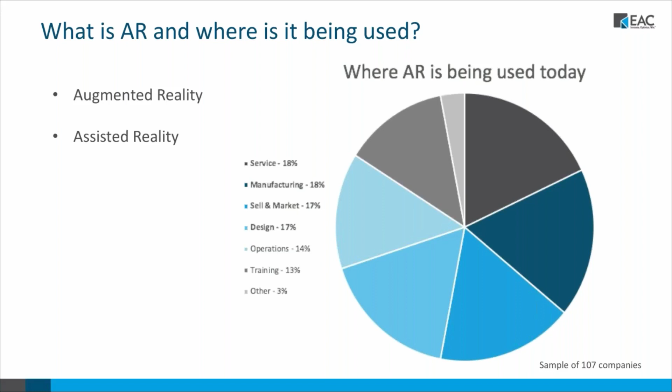And when we're talking about using AR for service, we're talking about the creation and delivery of service manuals, parts catalogs, and technical instructions. All of these assets show you how to do something. Turning these assets into an AR experience means repurposing the 3D models that you already have by taking that service information and putting it directly onto the product that that person is interacting with. We can do this with troubleshooting, remove and repair tasks, and parts identification.

I'm not sure about you, but I hate reading manuals. I'm a visual learner. A lot of people learn much faster actually seeing the process done as opposed to reading about it. You can now look at these real parts and see how they relate to each other by watching an animation of how those parts come apart or an animation of how to assemble those parts.

By doing this, you don't have to take yourself aside to read a manual. You can visually see this right in front of you directly on the products. There's also remote expertise where you can have a connection to the internet and have a subject matter expert over your shoulder, in essence, that can write on your display on whatever it is that you're looking at to make comments or tell you that this is the wrong part, etc.

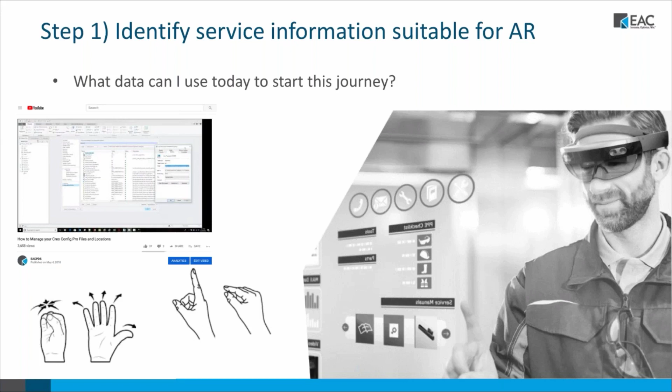Now let's go back to the question of what types of information make sense to leverage and what types of information should we recreate. You may have content that in the shorter term may just make more sense to use in assisted reality, where you apply a new style sheet to it and now it displays on an AR device in an easily consumable fashion.

As long as you are able to use the content by seeing a visual on your device, it can be displaying a graphic or showing a parts list or seeing an animation of a step-by-step procedure. Or you can find out after you've finished troubleshooting if the piece of equipment is operational again. Make use of the information you already have and create new content only when needed.

So after we identify the service information suitable for AR within our organization, we can then create animations and exploded states inside of a technical publication software like Creo Illustrate. When choosing a technical publication software, you should be looking for a tool that allows you to communicate accurate step-by-step instructions, provide quick and accurate parts identification, and create interactive and up-to-date illustrations for reuse.

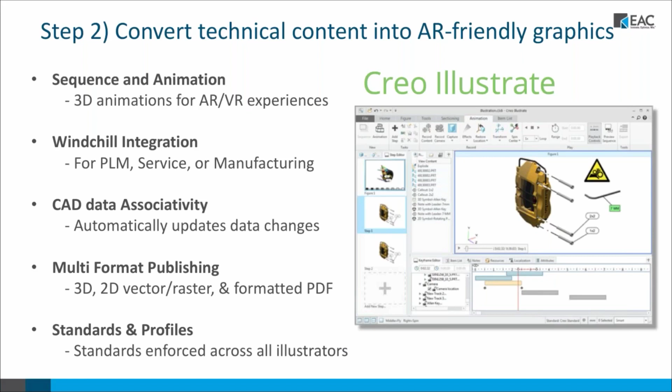Creo Illustrate does all of these things to create assets like service procedures, parts catalogs, assembly instructions, training manuals, marketing materials, and operating instructions. So our first step was identifying our AR suitable service information. Then we convert our 3D CAD models and technical content into AR-friendly graphics. Then our third step is to expand our library of AR-ready service content.

So once you have all of your content in visual graphics, including animations or exploded states, then we can start to publish and author those graphics as AR experiences. So content creators, technical writers, and product development engineers with no prior coding knowledge can create these experiences using Vuforia Studio. Experiences authored in Studio can be accessed from smart devices such as phones or tablets or wearable devices.

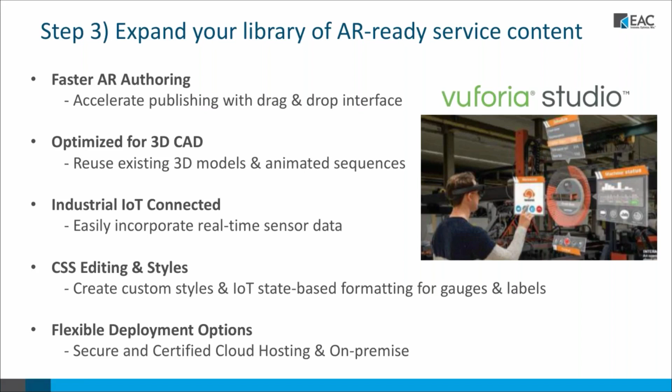So I'll just quickly go over a recap of what we just talked about, and then Todd will go into his demo. So as a recap, you're first going to identify all the information in your company that relates to service and categorize it as either AR-friendly or non-AR-friendly content.

Then you'll convert your technical content into graphics with a technical publication software like Creo Illustrate, if you haven't done that already. And then once you have these graphics, you can then transform them into AR content with Vuforia Studio. So they are ready to then be used for AR on a smart device or an AR wearable like HoloLens.

So I realize this is a lot of information. So you may be wondering, how do I actually get started with this augmented reality journey? It's a good question. You need to make the decision to actually pursue it. Don't let the fact that you may have content you consider not suitable for AR prevent you from actually exploring it. Everyone is on the same path, and everyone is just starting their AR journey.

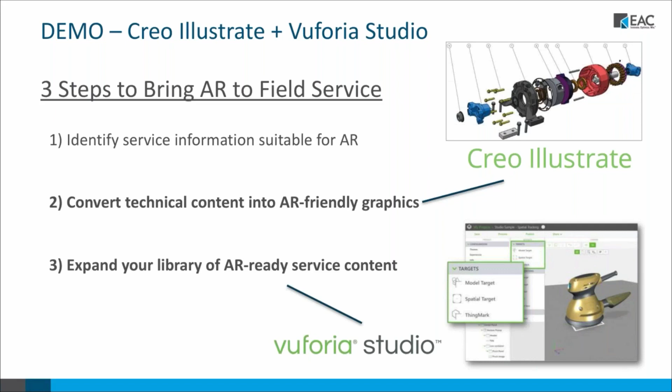So now that we've gone over 3 steps you can take to bring AR to field service, I'm going to turn it over to Todd so he can give us a quick demonstration on PTC's AR suite, Creo Illustrate and Vuforia Studio. So let's get started.

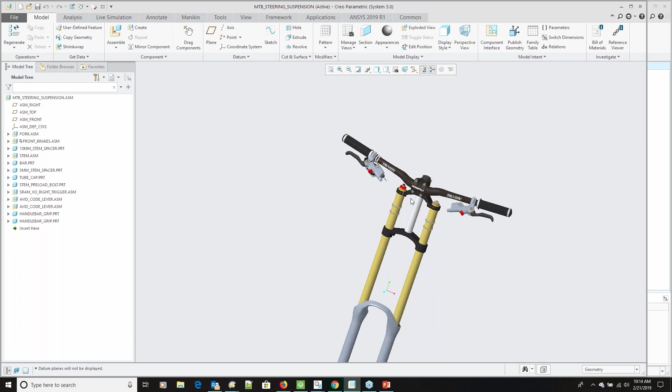So the first step in the process would be to take a look at the information that we have that we want to consider for augmented or assisted reality content creation. So in this case, I've got Creo Parametric up. I've got this front fork suspension for a mountain bike, and I might want to look at different things here as far as sharing this out and creating an augmented or assisted reality experience.

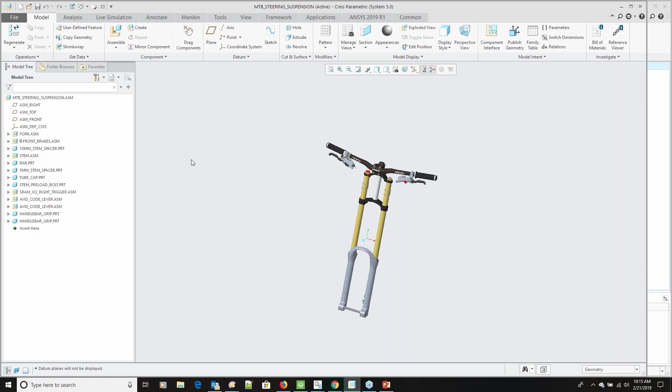So the general workflow here is that you're going to create your CAD information. Doesn't really matter whether it comes from Creo Parametric or other CAD platforms, because we've got Creo Illustrate. That's sort of the bridge between the CAD content creation tools and the augmented or assisted reality. So I'm just showing this from Creo Parametric as the starting point. So that's how we'll proceed. So I'll go ahead and put that away.

And now I've got Creo Illustrate. It's going to look very similar at first glance as far as the user interface. What I've got right now is just the same model pulled open, and we're actually looking at a published representation of that front suspension. And I'm in the process of creating a new figure. So Creo Illustrate is a tool that can be used in a number of different ways. We'll show you some of the different options here and how you can take that information and create figures for illustrations, as well as the augmented reality experience.

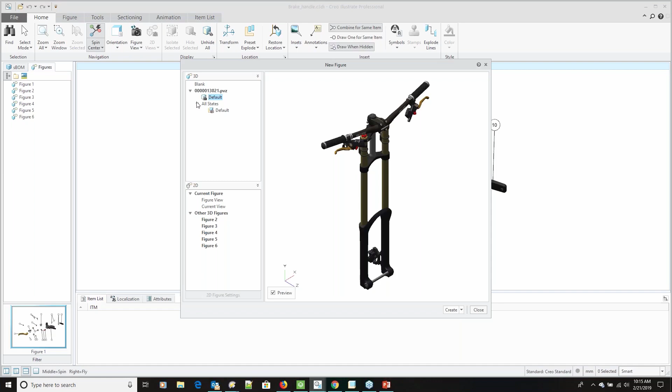So I'm just in the process of creating a new figure here, so go ahead and do a create and close, and I'll just go ahead and use that view. So this is where I would create different figures. So in this case, I've got this figure that I just created, and I've got lots of things I can do here as far as the orientation and explode states and animations and things like that. I've got a number of other figures that I've already created. You might see one down here in the lower corner.

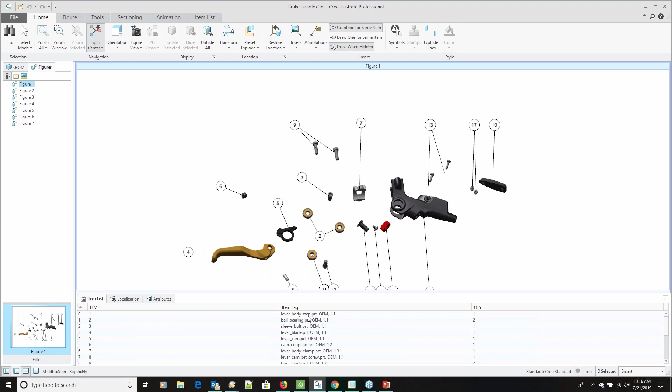So let's take a look at some of the types of things I can create with the Illustrate tool. So this might be something that would be useful for assisted reality. In this case, I've got an exploded view with some callouts, and I've got a parts list. So this parts list information could be set up in a text document or a PDF or something like that. So I could view that and overlay that and see that information off to the side, maybe looking through a device like a Vuzix, where I've got some textual information that I want to click on components and have them highlight and call them out and get specific information on that from there.

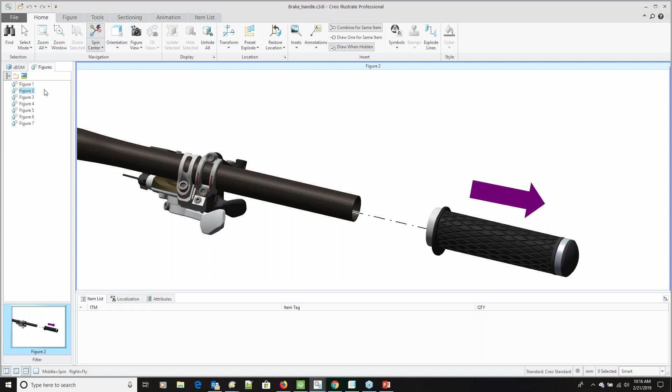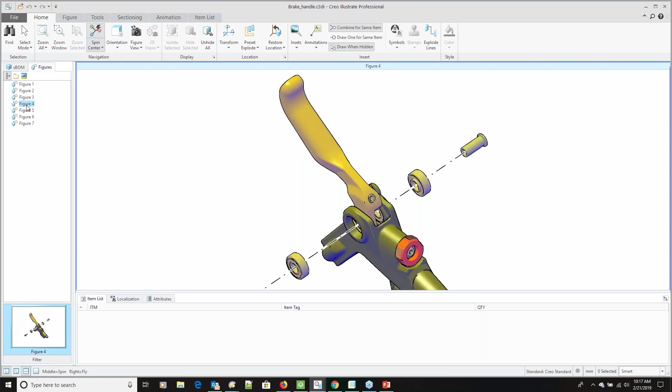Other types of figures that I've got, so again, Illustrate is a tool used for creating images and things for consumption in technical publications, whether that's web-based or PDF or augmented reality or assisted reality. So I've got different exploded views here just to show how this would look for technical illustration. So lots of different options for formatting the display and bringing in libraries of components and creating item lists and callouts and things like that. So here's another figure that I've got. So we're basically just peeling apart the model and creating the different views of the illustrations that I need to document the process.

All right, so I've got that set up here, and then another option here, let me go ahead and close that version of Illustrate. I've got another model that's in the background here, and we're going to get there in a minute. That actually is my Vuforia Studio. We'll come back to that in just a minute.

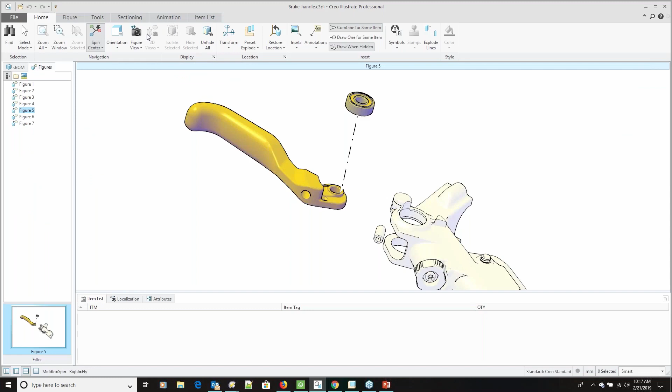I can create these animations, right? So in this case, in this new figure that we've got, I might want to go back in and create either an animation for a video, or if I want to show sequences and steps to show somebody how to take this mountain bike suspension or the fork and the handlebars and take it apart and show how that would work.

I'll just show you a little bit on that, and then we'll show you how you can bring that into the Vuforia Studio so I can start to consume that in an augmented or assisted reality type experience. So we're going to go with the animation, and we'll just start to take this thing apart. I'm going to create a sequence in this case.

And the sequence is different from an animation in that the sequence is going to proceed sort of stepwise, and it's going to wait for input from the user to say click a button or show the individual step, and then pause until the user is ready to go to the next step. Whereas an animation is your more traditional video, right? It's going to play from start to finish and show you all of the entire motion or the assembly or disassembly sequence for the object.

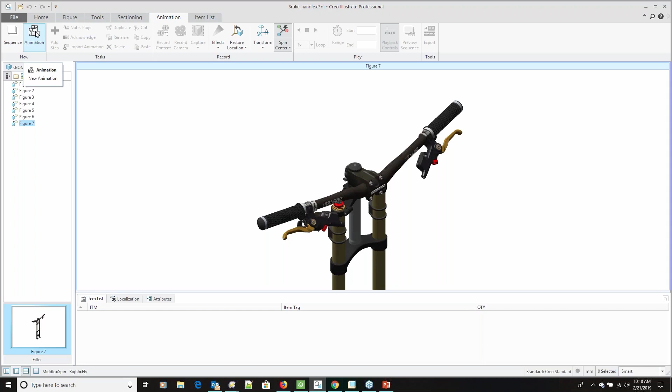We're going to do a sequence in this case and just show a few steps and then show you what you can do to consume that in the augmented reality world. So just as simple as picking on the components, we're going to go ahead and start to drag these things apart. Right, so I can go ahead and say, I want to move this thing around, but maybe I want to put an effect on there. Maybe I want to change a color for that to bring attention to that, that I'm going to go ahead and highlight that during the video.

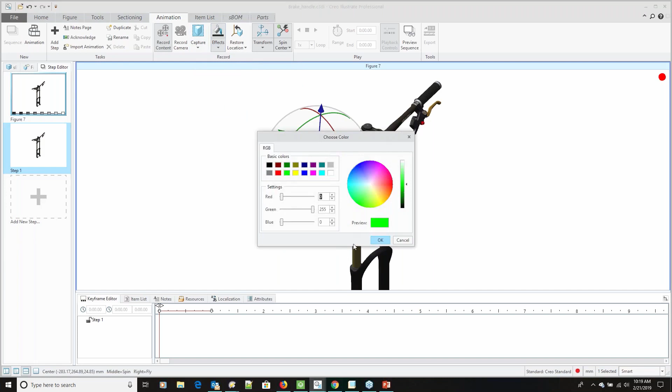So go ahead and grab this component, we'll move it out. Maybe we'll move that out 300 millimeters. We want that to be negative 300 millimeters. And have it go the right way. And then I can put another effect on that. We'll pick on that component and say, hey, let's actually fade that out when we're done. So go ahead and fade that out. And then we'll do this on the other side. We'll do the same thing.

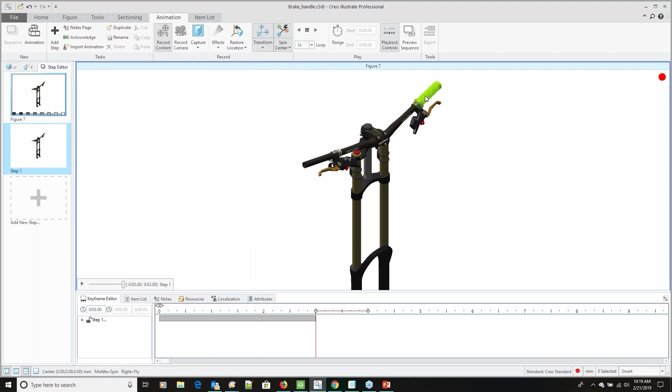We'll have that apply a color there to that. We'll actually flash that in. Let's pick the red color this time. And then we'll actually drag that out and we'll say, hey, let's have that go also in a negative 300 millimeters. And we'll do that same thing again. We'll actually fade that back out again. So I'm creating this little animation. And if I want to sequence those things together, I can do that, right?

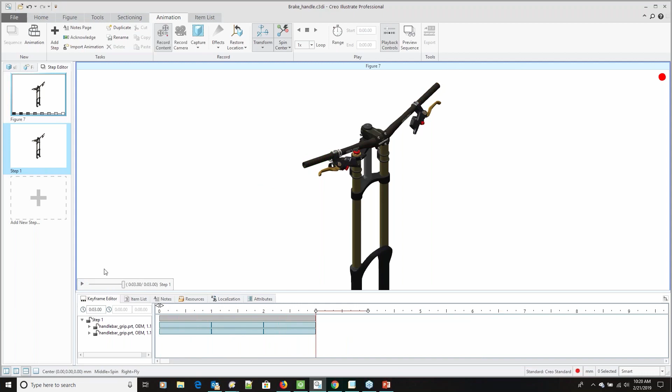So I'm just going to drag these little blocks here, so that those components are going to move kind of together simultaneously. We're going to move both the left and the right handlebars off simultaneously. So if we go back and play that back, we'll see what actually happens there. We flash them with the different colors and we'll move them out. So that's the first step. Then I'll go ahead and add another step, and maybe we want to take this handlebar grip, or the brake caliper assembly. We'll go ahead and move that.

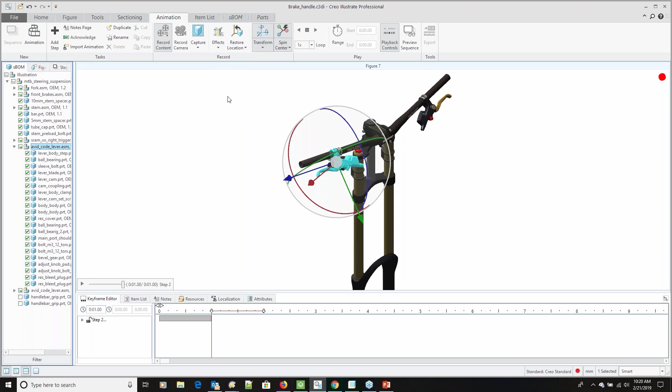So I'm going to go back here to my bill of material or my structure for my assembly, and pick on the component here and say, this is the guy that I want to move right here. So I can move that whole entire assembly all at once, right? Same type of thing. We're going to go ahead and say we want to apply an effect to that. And in this case, we're going to pulse that, right? So we'll pulse that, and then we'll do this same sort of drag operation here, again with the 300 millimeters, move that out, and we'll apply that effect.

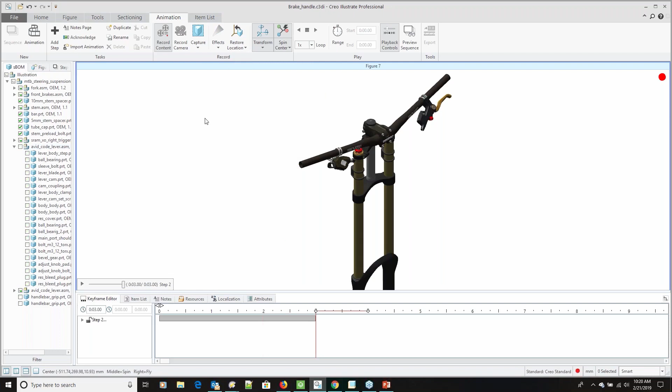So I think you get the idea there that I can kind of push and pull and rearrange my assembly to show the different steps that are going to happen here. So go ahead and apply this last fade out to that. When I'm all done with that, right, I'll take the different steps and kind of proceed through until I have all the steps that I might want to perform in that sequence completed. Then what I'll do is I'm going to stop the recording, and then I can go back and save that out into a format that I can use in Vuforia Studio.

The other thing, just to touch on this briefly, this is recording the components and those items that I'm moving around. I can also record the camera location. So if I want to fly around to a different portion of that model, I can. I just change the camera location.

That's less important when I'm in the augmented reality, because I can actually manipulate the model and walk around it, or use finger swiping on my device to rotate the model around. So it's less important when I'm in the augmented reality, but just know that as I'm creating either animations or sequences, I can record the camera location to change that perspective on the model.

So again, to complete that process, I'm going to go ahead and publish that. We're going to publish that information out as a viewable file, and that's going to be the input into the Vuforia Studio application. So again, where did we start? We decided what we wanted to bring into the augmented reality experience from our CAD platform.

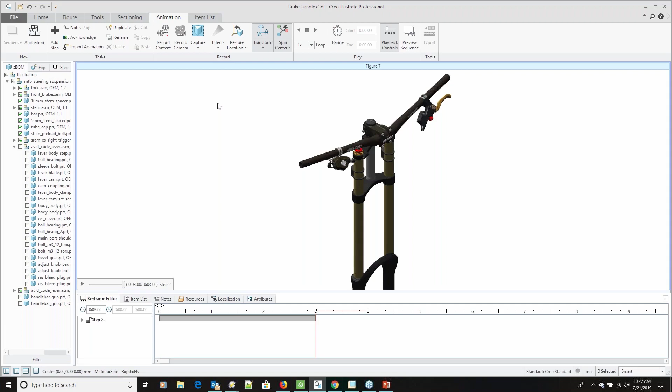In this case, we're using Creo Parametric, but this could just as easily be SolidWorks or CATIA or any other CAD model. I can bring those items in via Creo Unite functionality, and then create my different sequences and steps here. I'll publish that information out, and then from there we'll go to the Vuforia Studio application, which is a web-based environment where I can drag and drop components and create my experience using the Vuforia Studio tool.

So this is what it looks like in Vuforia Studio. I've already done two things. I've dropped in a ThingMark. There are a couple of different ways I can look at this model, either using a ThingMark, or a spatial target. Those are things that I'm going to point my phone or my iPad at to start the experience. So that's this little ThingMark down here at the bottom.

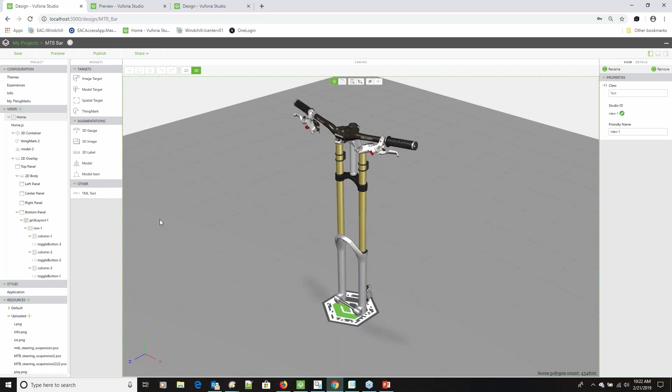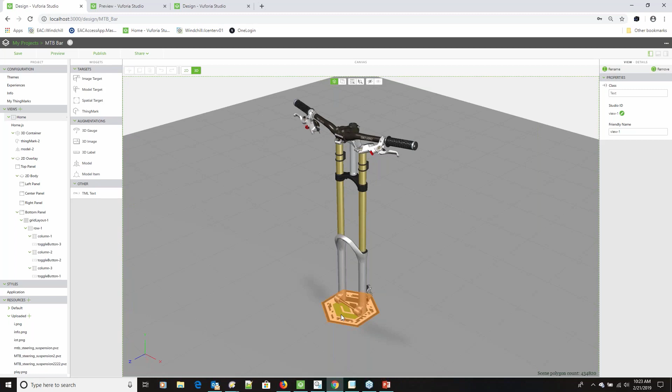It's sort of like a UPC code, PTC specific, that says this is the information that I want to get at with my device for the augmented reality experience. So when I publish this out, I would point my phone at that ThingMark, and it's going to open up this experience and let me start to interact with that assisted or augmented reality world. So that's the first thing.

The second thing I've done is I brought in this model. That is what we just published from Creo Illustrate, and I basically dragged and dropped it. Over on the right-hand side, you can see that I've got options for scaling or positioning that in the world, so I can rotate this thing around and see where this is located in space.

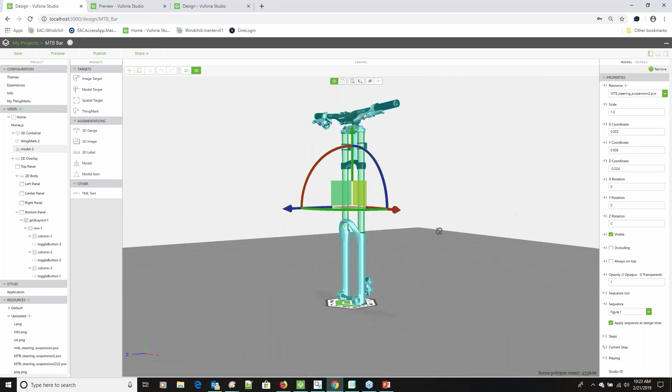So there's really two components to what we're doing here in Vuforia Studio. The first is the 3D model that we're going to build our experience around. The second piece is the 2D interface that I'm going to overlay on top of that, so the user has a way to interact with the model. We can give them buttons and controls and all kinds of widgets and sliders to manipulate the model, and we do that in the 2D overlay that sits on top of that 3D model.

But this is the first step in the process. We would bring in our 3D model, get it located and scaled appropriately so I can actually interact with that, and there's different options for placement. Up here at the top, I'll just touch on this briefly. This is a 3D view of what we have going on in our world right now. I have the 2D option, and I just put together a very simplistic user interface.

There's all kinds of options here for how you want to interact with this model. You can have sliders and buttons and radio selection options and all kinds of different toggles. It's really giving you the ability to create a user experience and dynamically interact with the model. I just picked three different options here to totally reset the model, play through one step at a time, or play through all of the different steps that we created in that model.

And so again, this is completely customizable. You're developing this for a specific user interface or device. You pick the device that you want to develop against, and you can see a preview of what the user interface you're building is going to look like on the device. So if we go back here to the 3D model, well, let's stay here right now. The way that this works is you're going to bind the functions of the buttons that you create in your interface back to the model.

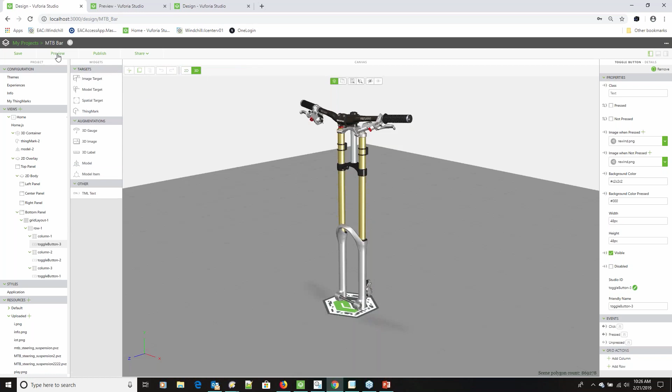So what does that look like? It's a little tough for me to show this with an iPad or a phone on the web. So what I'm going to do is just simply do a preview here to give you an idea about what this is going to look like. So take just a second here. You can see in this case, it's an iPhone 6 interface. But if I want to look at a different sort of interface here, I can go ahead and pick this and show what this is going to look like in an iPad Pro. And we can flip the orientation to landscape.

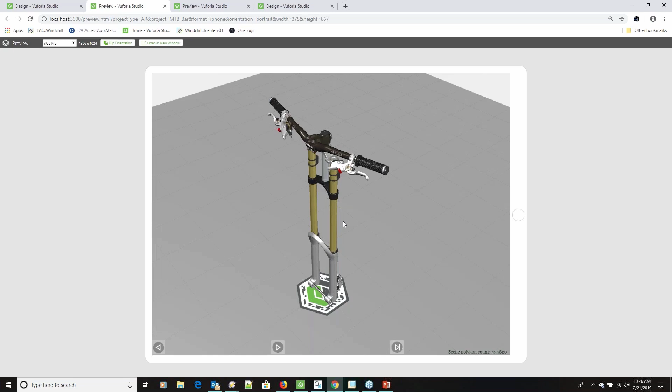And then I can interact with this model, right? This would be like if I'm using my fingers to rotate the model or zoom in or zoom out using this interface. Again, it's a little tough for me to actually show that in a web presentation, so we'll just use the preview function here. So if we want to see what that looks like, we can go ahead and hit the play all steps. I've got a few more steps that I put in this case, but to give you an idea about how you can actually interact with that model.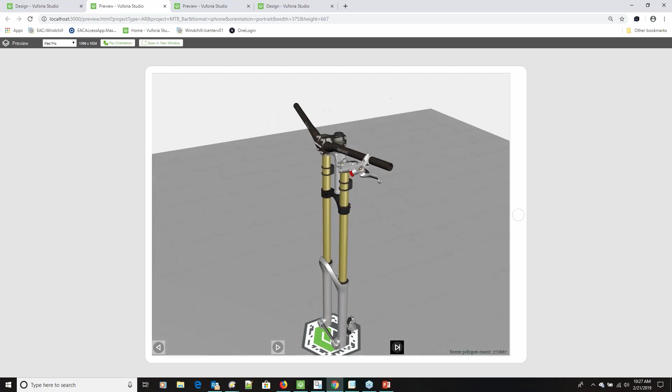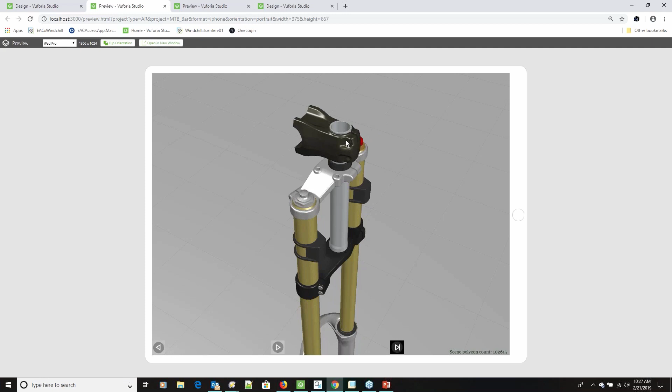So I can fly around this thing while it's doing its explosion and the disassembly sequence, kind of see things going apart. And so I'm interacting with this model sort of as if it's sitting here in front of me. I can do this assembly or disassembly sequence and play things back and see what's going to happen when I take the model apart. So that's single stepping, progressing through all the different steps. If I want to reset that, we'll just go back here and hit the button and reset back to the original starting point.

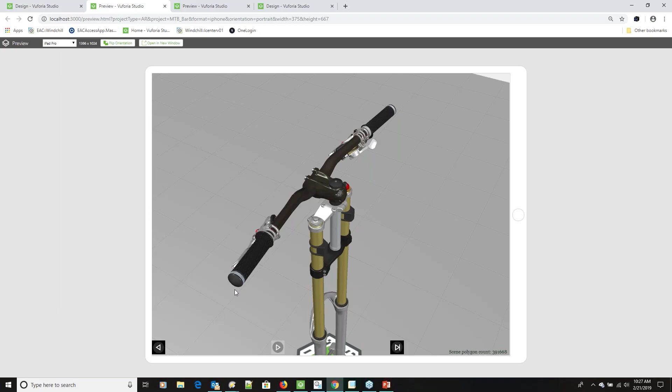So that's a really quick overview, summarizing what we've done. We started off in our CAD model, we brought it into Creo Illustrate, we created some sequences, and we've gone from there to create this augmented reality where I can look at this with my iPhone or a HoloLens is the word I'm looking for, with the goggles, and look and see what's happening with the model. So that's what I have.

Questions or comments at this point, Cassie? I'm not seeing any questions, but thank you, Todd, for that demo. Hopefully this presentation gives you an idea of how to start down your AR journey.